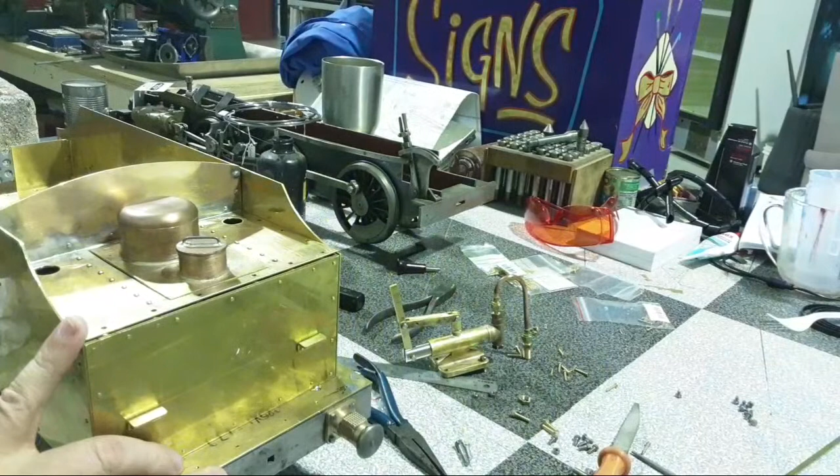My life is made up of small piles of screws, like these ones. And if we move this tender forward, those ones. And small piles of rivets. There we go.

So that's what I've been up to. Much the same, I don't know if you can actually see any progress here, but I'd like to think there was. I had 2 days off this week and this weekend, and there's a gap between them. I went back to work on Monday, so it was Sunday and Tuesday.

Most of Sunday I spent messing around making an awful video for Toolfest 2021. Go and check it out. Hope to see all your entries. I'm on the squeaky chair again. There's Maddie, g'day Maddie.

Rivets like these, Kevin. So these nice 2 straight rows of rivets. It's deceiving, but there you go.

No specific hour, I reckon the 24-hour period's close enough for us, Knox. Michael, I think probably if you can aim to within 24 hours on that date, that'll be good enough. We got too much confusion last time I tried to get closer than that. Just post them.

Maddie's flat out busy.

We'll move in a bit closer, perhaps. It's junky everywhere, sorry. So this lid just sits in here at the moment.

We have a lid that's probably going to be hinged over the back at some point, because I really can't hinge it that way. And there's holes here for what's going to be mostly cosmetic, but actual functioning vents for the tank. Reason it had vents is that most of them were fitted with a water scoop, so they have little caps on them and a flange at the bottom. So if you're filling up the tank in a hurry from the bottom, then you needed the air to go somewhere, so there's a vent each side.

So that means we can't really tip it. Well, we probably nearly can tip it that way. We'll put the vents in first, and if we can tip it that way, we certainly will. But I think it's going to be tipped this way, like such, with a hinge off the back gate, which is sort of okay. Anyway, I don't want lids that are loose.

That's where I'm at. I don't want lids that are going to get lost. Will it be painted? Yeah, black with red stripes and British rail lining, I think, or LMS, or I haven't decided. Maybe red. Caledonian Railway blue. I don't know. I really don't know.

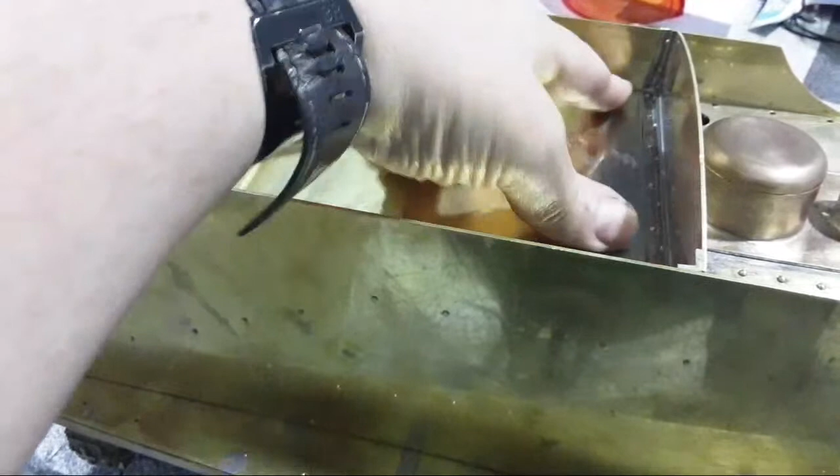I've actually soft soldered this, which I'm really pleased with this job. So I'm going to soft solder the rest of it as well, and I'm a bit more confident about it now I've done this, haven't buckled it. But...

Magnet's not a bad idea, Fridge.

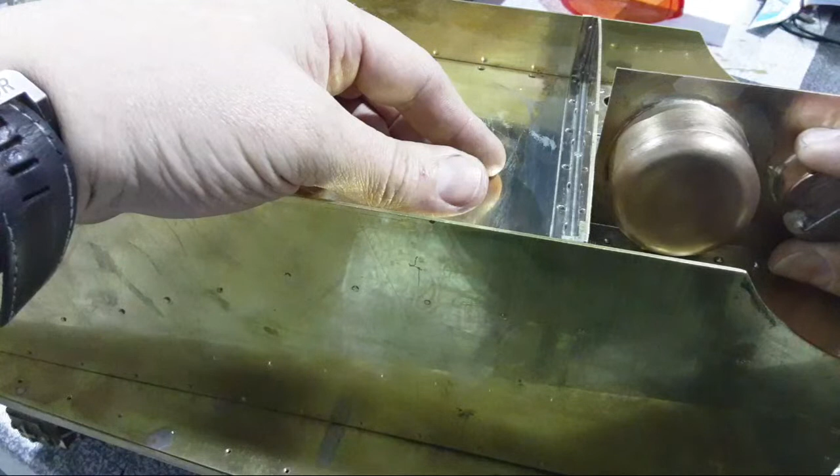Hey, John. Nice indicator from John Creasy on social media this week. Maybe we'll see a video. We might not too, but I hope we do. Before Toolfest 2021, which is coming up. We might just get lucky and a magnet might actually hold that.

Anyway, so this has got another plate riveted underneath here, and I've soft soldered it all around there, so we just sweated it. Nice. This lifts out.

It won't when there's all these screws in here. These are countersunk screws all through to here, and they all line up and look, sit flush and not too crooked or anything. I'm really pleased about that. All the way down here, and around the front and up the other side. And these ones will be round head at this point, sort of to match the rivet.

And if we've got to, we can still take that out.

Got all these on. This is a scary, rotten job actually. I'm glad this is over.

No video, John says.

This is a rotten job here. Getting all this so that that sheet with the bends in it sits down flush on here, and the bends are all right, and they haven't got too many double bends in them and things like that.

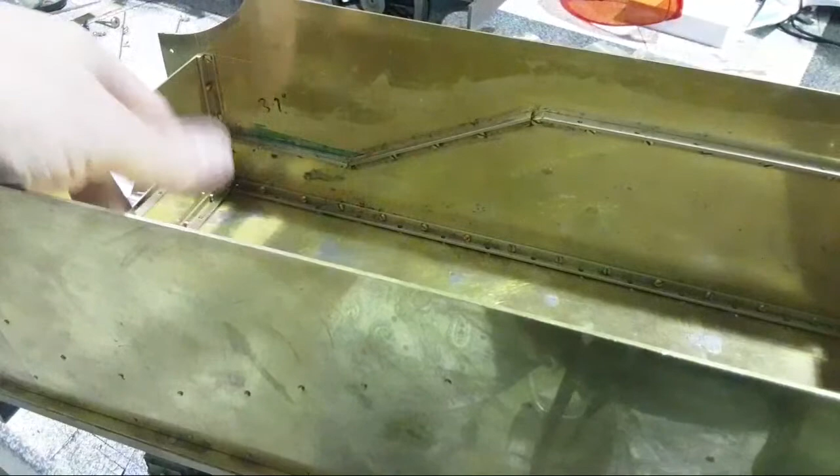This sheet fits around this corner here, which I really like. I'm a bit impressed with that. It fits around there nicely and screws across the front.

Now I've marked this here with, I don't know, you can probably nearly see the two scribe marks on there. There's an angle bracket goes around here, the same as this, up the side. And then the top, the front piece with the doors on it, or whatever's going to have, or a toolbox or whatever, will sit on there for cosmetics when it's on display, and you lift it off to use it because you can't shovel in under there. The same problem they had with the real one is that you couldn't shovel in from out the front, so they changed them.

Oh, that's pretty awful. Two ceilings down is not fun. I hope that gets sorted, Mike. That's not good.

So I've got to fix these this weekend. Put those brackets in at least so we can start making the front piece.

What else? There's an edge beading goes along here on the outside.

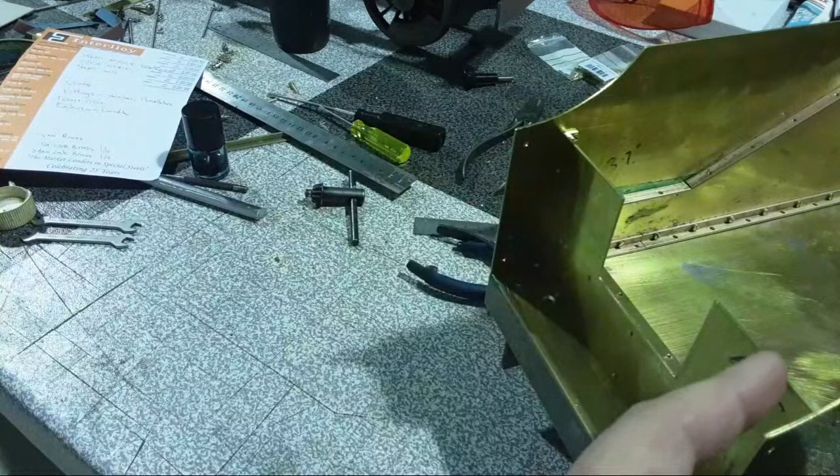There's on this side, there's a brake handle here. There's a water scoop handle on here, or there should be, but I'm not even going to put a fake one, I don't think. We'll see how we go.

This piece sits in here and hangs over the front a fraction to give it a ledge, and then there's a piece of angle behind it to stop it moving forward. So that sits between that piece of angle on the back and this piece here, I think. That's what I've designed.

Probably the earlier Fowler tender just had a full-length toolbox here, and maybe that's what it'll get, is just a metal toolbox with a lift-up lid. The later one had full-size doors through here, high doors with opening doors and a toolbox each side. I don't know if we're going to go to that much trouble. So there we go, they're forewarned.

So that's the work to still be done on this. Right, and from there,

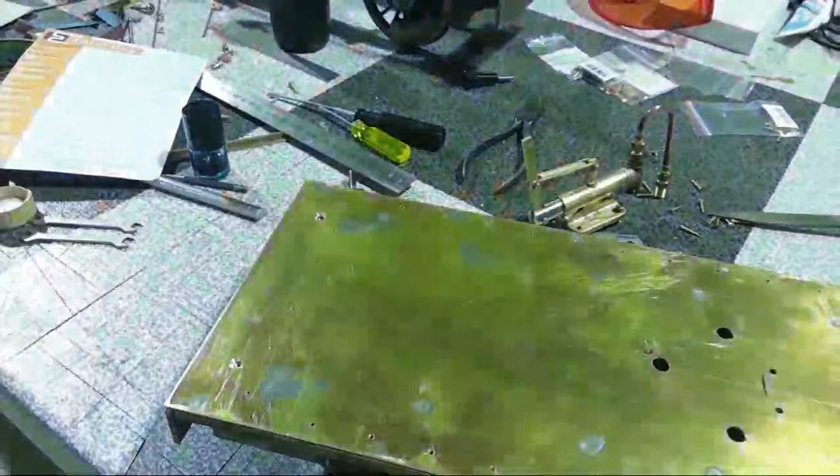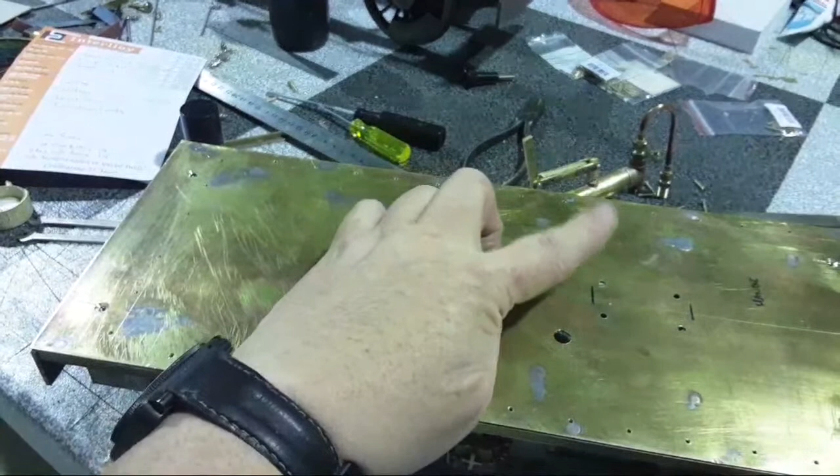If we lift this off, right, we have two more holes here, one for the pipe for a return and one for the water feed. This one's got a filter on it, and this one I think's just got a swan neck round so that it doesn't squirt up in the air. It actually pumps back down onto the... so that's where we're going with that.

I've put 4 screw down bolts in here, countersunk brass screws go in the front here, 2 in the back and 2 in the front to hold this down, right? And I've done some modifications here because when I did it, I put 4, I think 5BA steel bolts in here, one here, one here, one here, and one back here, which is okay to hold this in place.

However, it's overkill, and what you find is that when we put steps on here, which go in this gap here between this angle and the frame here, there's steps come down here with 2 steps on them and a bit of a curve for each end, which has to go on next before we bolt the tank down.

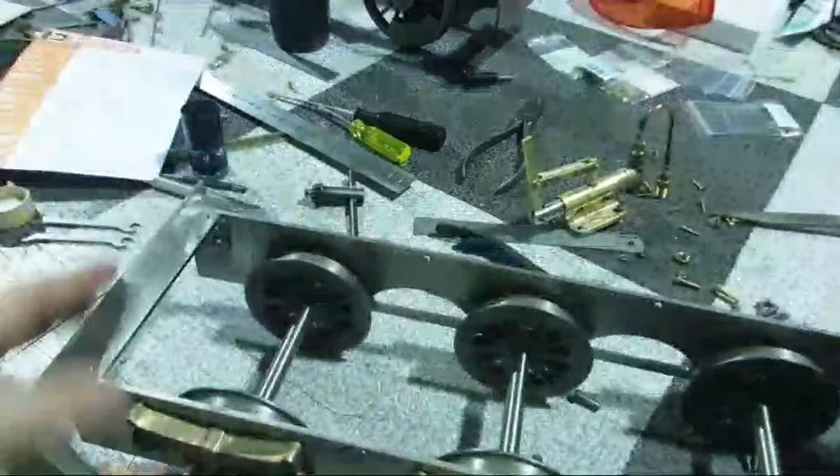Can't get to these bolts in the end, so if you have a look, actually spent an hour yesterday blocking these up. Can't see them now, no bolts, so we've just got 2 in the middle, 2 each end. That's plenty, so there we go.

Still got to put 3 bolt holes in here for spring hangers, or for brake hangers. It's still got to go in here at some point, so that's another job that we've got to do at some point. It probably, when I pull this down again, if I do, that'll probably be done then.

So there we go. Also got to put another bracket in here for a coupling plate to the locomotive. Also, there's some pipe work. There's 3 pipes. There's a hand pump delivery pipe comes through to the front here, and there's a delivery pipe from the axle pump, which is suction, no pressure in it really, comes through as well. And there's a return pipe, which is pressure, I guess. Well, there's no pressure because it's open end, but yes. So we've got 3 pipes on the front here as well.

So this is one of those jobs that feels like it's never ended.

Something to wake up nightmares, something to keep you awake is more like it. This thing's crazy.

That's where we're at. This is a pretty crazy project all up.

This pump here, I guess everyone's seen that, goes here somewhere, so that sits on there like that, and accesses through that back opening, which is why it's a big square opening, not just a little round opening. Anyway, that's where we're at.

Sorry about the squeaky chair, but that's kind of where we're at with the brass work. It's starting to look like something, but there's some jobs that I've been putting off.

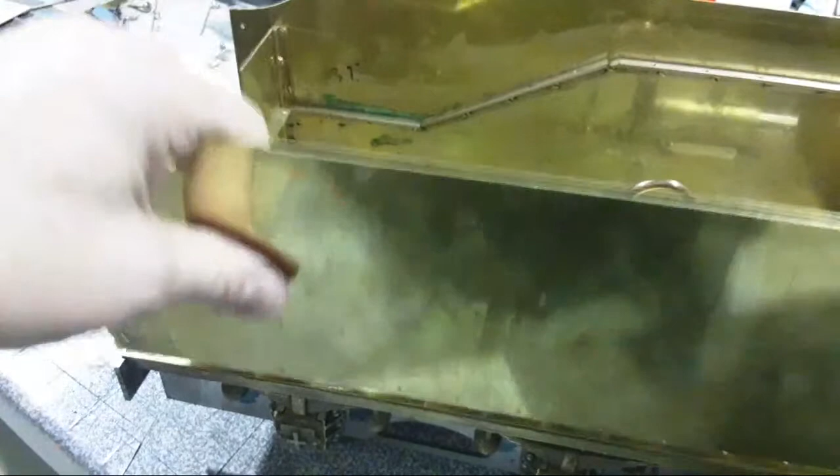Absolutely. Something's not sitting down there properly. Yeah, the wrong side of the frame.

There we go, that sits in there nice. And then this one goes on here like this. And this one, I'm going to say, have a look at that joint there. It's really nice.

Anyway, this one goes in there like that with lots more screws. So there's about 300 and something screws in there. That's kind of how we are.

There's not a whole lot of other detail. I've got the handrail holes here and here for little handrails to go on here. Bit of work in the front. We've got to make something here in a toolbox and some little hinges and stuff. There's a bit of work in that.

Probably it's not going to get polished. It's going to get a coat of decent undercoat and a coat of decent black paint. That's where we're at with it.

Oh, Maddie, you poor thing. But you can't, this is smooth. You can't actually feel this through here where the soft solder's impregnated the brass. So it's nice and clean.

You can pick up brass at bargain prices on eBay if you keep an eye out for it. And I've been collecting these up for years.

Copper pipe. Let's have a look at the boiler code, eh? So this is coming together.

It's a crazy job, and another month maybe I'm going to have a tender that's going to sort of be half looking like it's finished, and then we can move on to the boiler. That's the next bit. I'm going to put this out of the way.

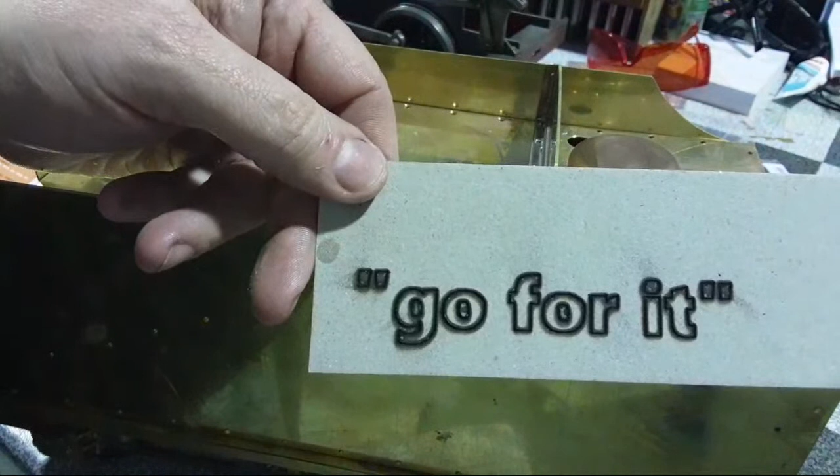In the same vein as we've been talking, a certain YouTube creator believes in this, and I'm sort of the same sort of mindset. Just do it.

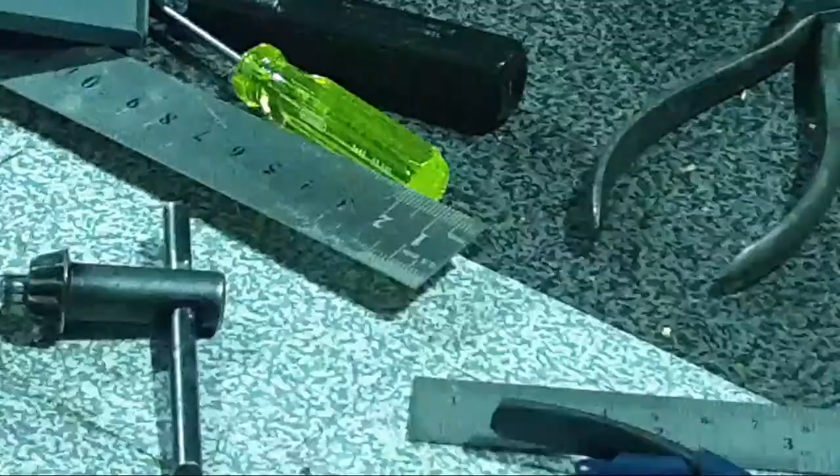So, see this book? This is it, this is where it is. Can't get to find it online. You won't find a cheap copy because the copyright on the thing's guarded, and it's a small community, so you've got to actually buy the book. There's several places you can buy it. This is the Australian Miniature Boiler Safety Committee Code, Part 1. There's 4 parts to it. I've got several of them. Never built a steel boiler, so I don't have that bit, but I've got a few of these.

This is the book on copper boilers. Thanks, Craig. It's fairly comprehensive, like it's got lots of crap in it. It's got types of metal and all the copper codes. If you're going to get certified, you've really got to stick to that, know what you're getting. Brazing alloys, bronze and gunmetal, caulking materials, etc, etc, etc.

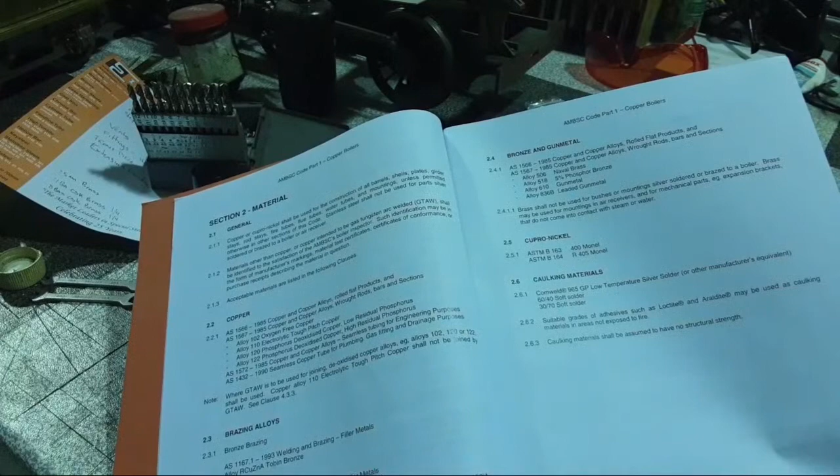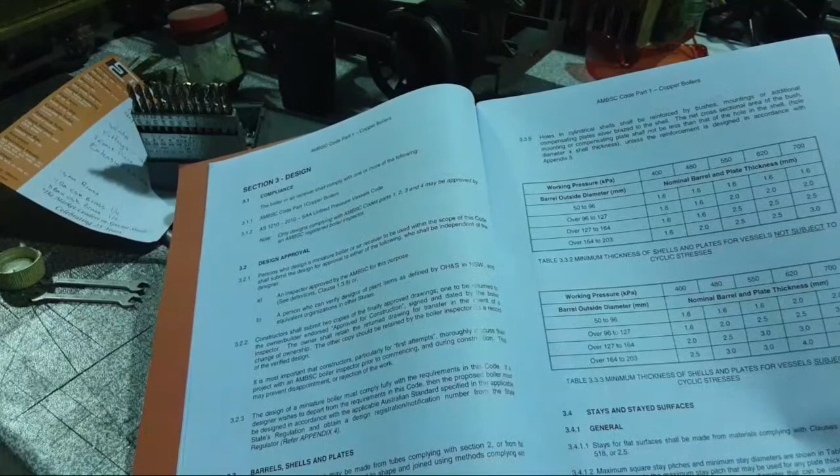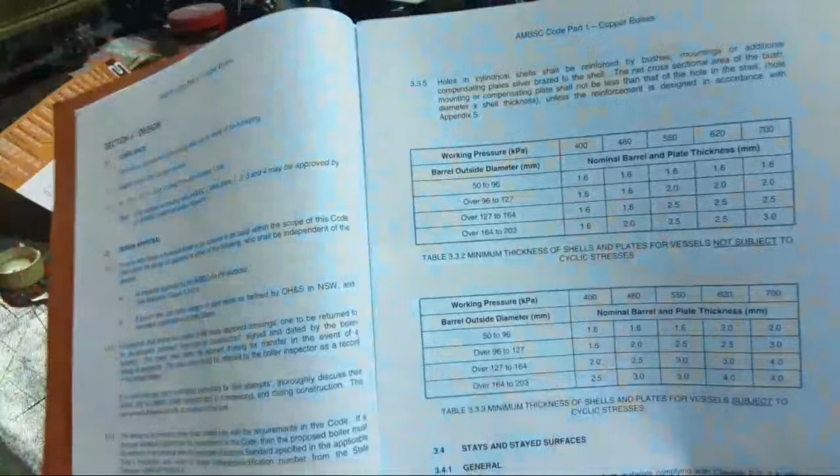We'll move on to design. So what do we got? There's a question: what type of copper is suitable for a steam boiler? 80mm diameter, nominal barrel and plate thickness is 1.6 mm, which is normal seam copper pipe, which is a bit of a problem for boilers. Something without a seam is probably better, but this is for vessels not subject to cyclic stresses, so gas tanks, I guess, and air compressor tanks. I don't know what else.

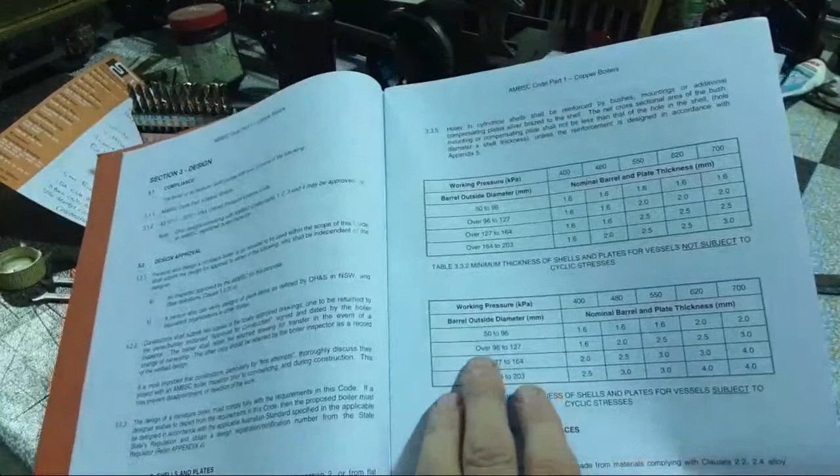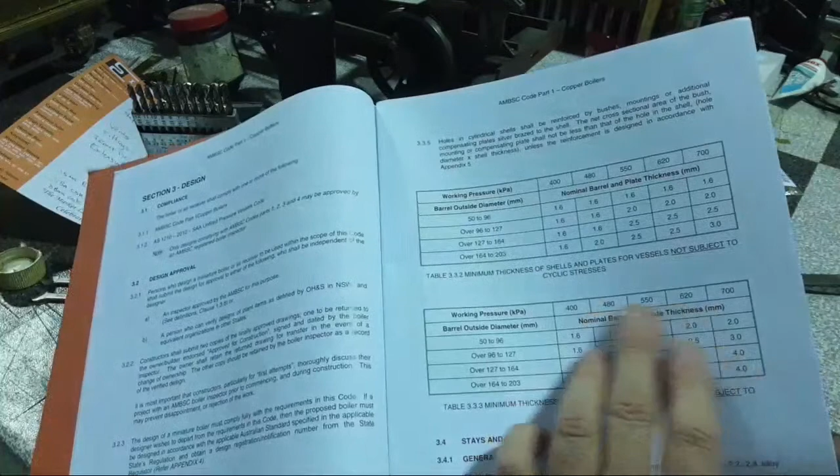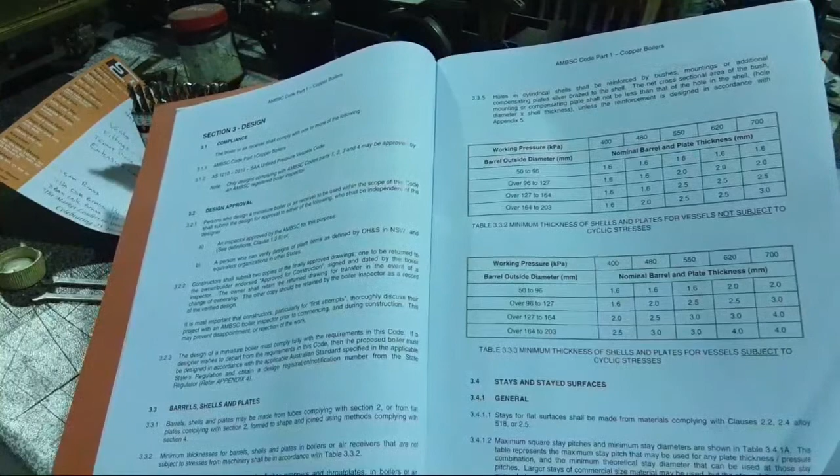And this is for those that are, so heating and cooling and stuff like that. So 80mm, 50 to 96, 1.6 is suitable up to 80 psi with the right stays and things in it. That sort of copper tube, that's the sort of pressure you're probably going to get out of an 80 psi tube if you stay it properly and put some tubes in it and decent ends in it. That's what's safe.

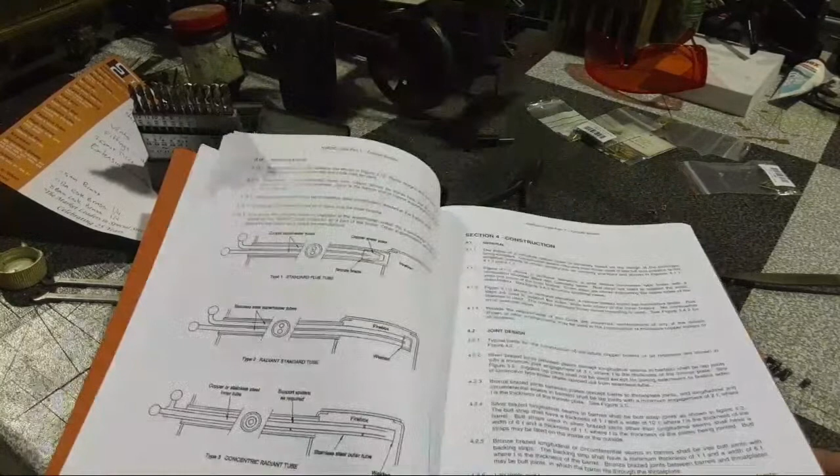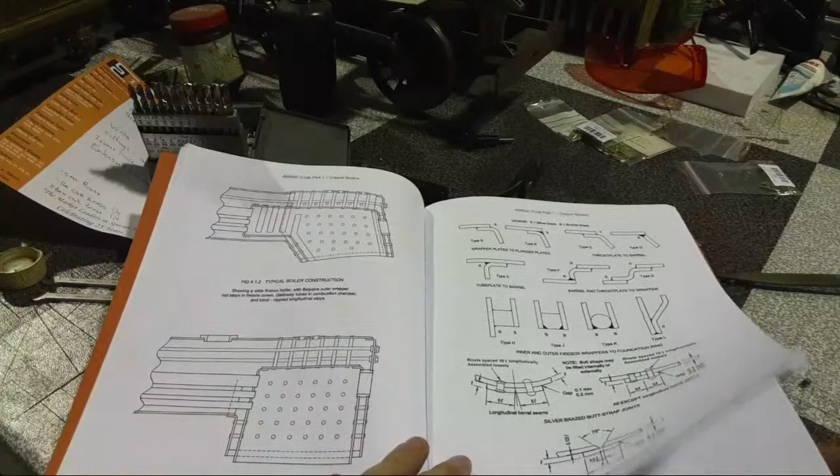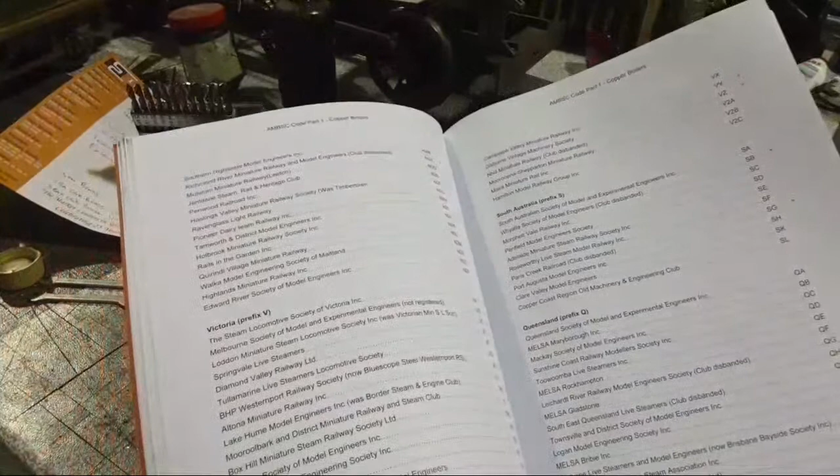This has got a crap load about stays and end plates and everything else. Bushes, domes, superheaters, lap joints and brazed and silver soldered joints, the butt joints and lap joints and so forth for barrels, safety valve design, washout plugs, and appendixes on all the above over here somewhere. All the New Zealand societies that use this actual system, and the Australian ones will be here too. There'll be pages of those. Probably should go through and chase all them up and see who has a 3.5 inch gauge track that's closer than the Queensland Society of Model and Experimental Engineers, which is like miles away.

Blondie Hacks had a bit of trouble with the copper boiler. Yes, she's trying too much at once. She just hasn't got the heat to heat the whole thing up. The boiler's too big for the deck thing that she used. She'll get it right, but the reality is that if she'd soldered one end in and pickled it, then put the rest together and soldered the other end and pickled it, then put the tubes in and pickled them, she might have had some success, but she's just pushing the boundaries a bit with that.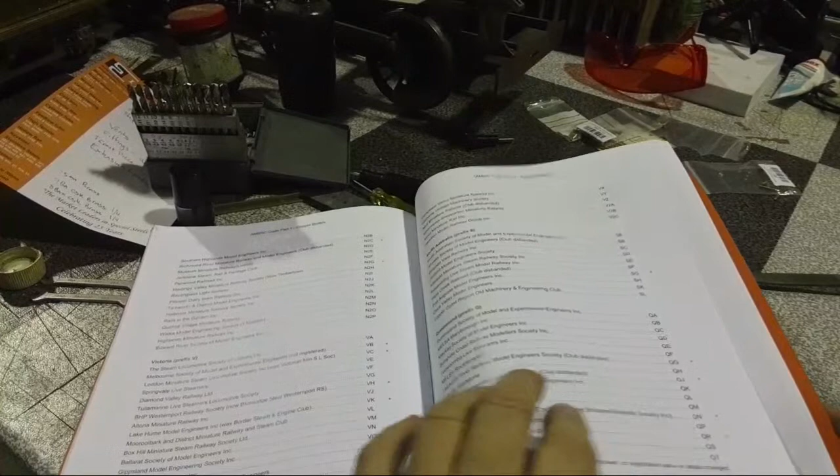Anyway, that's the boiler code. That's what it looks like. Difference between, or spacing between tubes and all that sort of stuff. I've studied it until I'm sort of saturated with it. But anyway.

If you can find it online, that's good, but I'm not sure you will. I never had much luck with it, so I just basically bought it. But if you want to know anything, I'm happy to screenshot it.

So there we go. That's the chaos that is building a 3.5-inch gauge locomotive.

You did pretty well in a weekend, because that's Russell. That's a mammoth job. Hang on, I'll just set up the bending brake.

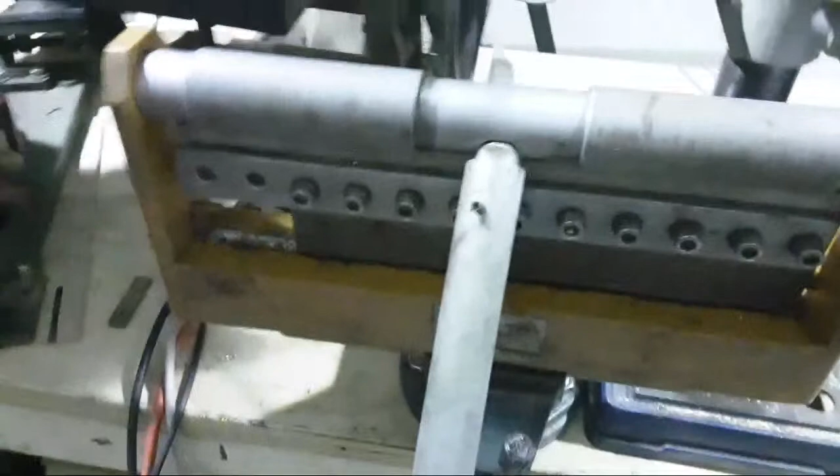So we're going over here, and I've got bare feet, which isn't really good in the workshop. This is what I've got.

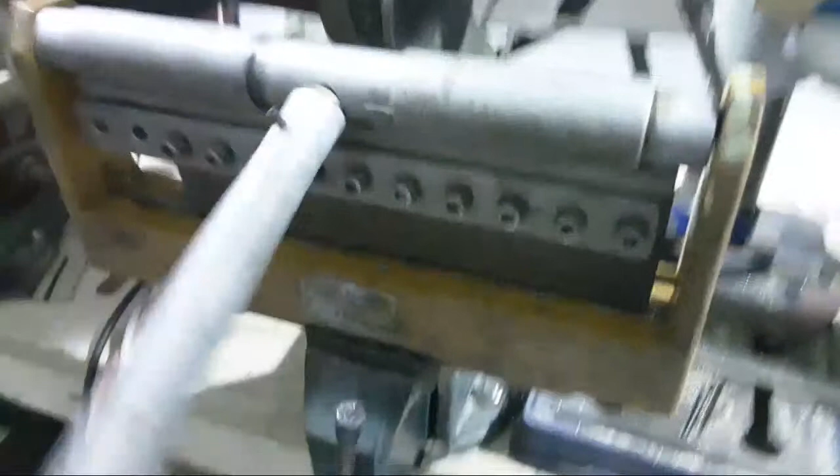Don't have anywhere over here. I had every intention of getting somewhere over here to set this up. This machine's done a fair bit of work, as you can probably see. It needs some love, but I have this little brake.

It's missing the jaw, it's there on the bench. I should put it back in. It's fairly useful to take it out sometimes and then discover that you still can't get the part in there. It's just on a cam, so it's pretty straightforward.

It has some limitations. Don't buy one of these for model work. For one, you get a shadow line there even with the light on. And you see I've got a light right there over my vise for this because before I had problems, but even with this you get a shadow line.

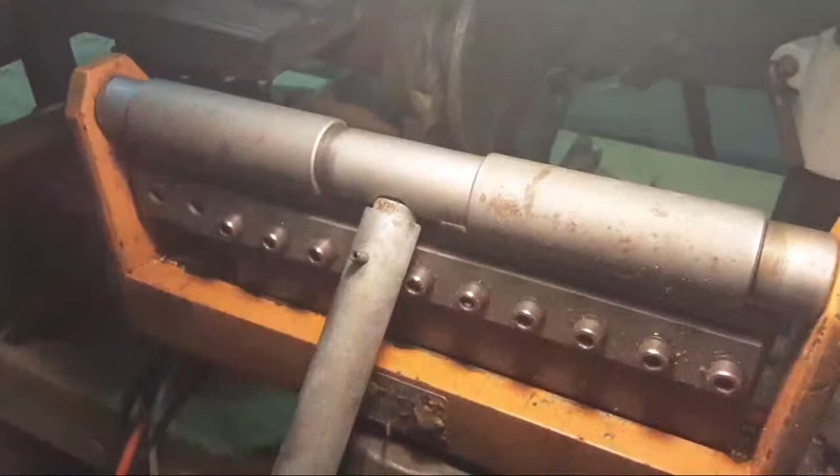So you can't really see where you're actually lining up the line without a lot of messing around. This light should be out this way a bit more.

Poor thing, could do with a wipe down. Also, it won't bend anything closer than basically the width of this V. So the problem is you can't bend a bit of sheet less than about 6 or 8 millimeters from the edge. That's a bit of a problem with it.

Okay, Dan's listening to some pretty ordinary, interesting sort of stuff in there. She was obviously... yeah, who knows.

So this bender could do with some work. It could also do with some mods. Ideally a brake press would be really nice for the sort of work I do. This is good for bending heavy sheet metal in short bits.

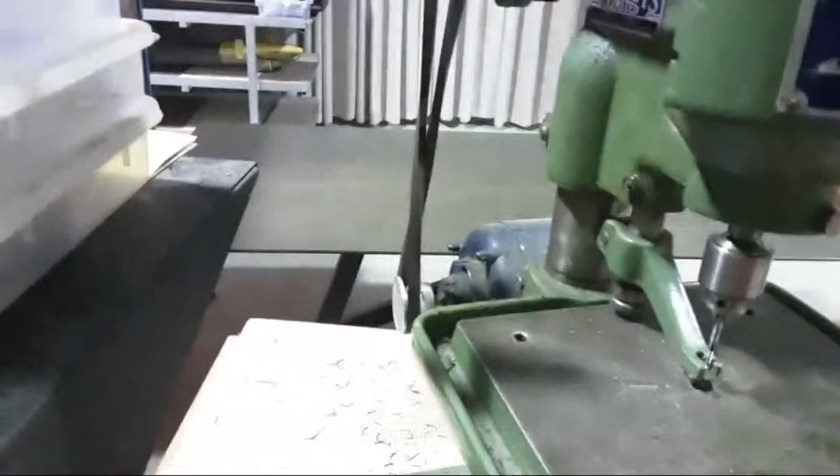This is all an experiment. Should have worked out camera angles at some point earlier. What else have we got here?

We might have something there. We've got that. I think we got it.

Look at that. This thing needs oiling every time you use it. There's about 1,000 oil points.

I don't know if anyone's really entirely interested in this. There we go, we've got actual lift off. But this is the coolest toy in the workshop.

See, that's bomb proof. There's 4, 8BA holes.

Dan, you're probably right. Hey Dan, good to see you. Journeyman Randy, good to see you too. So, yeah, this is...

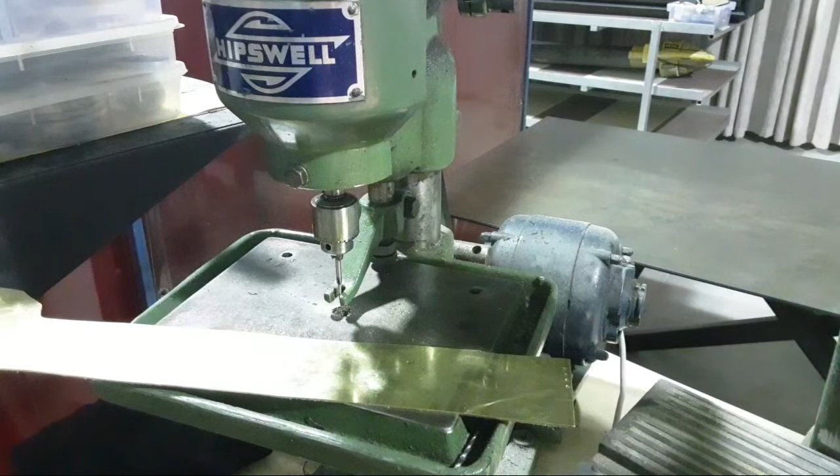But awesome machine. That's 8BA, which is 2.2 millimeters, something like that. Someone will correct me, but I think that's about what it is. The motor's the original one off the mill, so it's relatively the same time period.

Now, I'm going to put a question out there. Here, see this round belt, right? It's a woven round belt. I think it's not going to last forever. It's starting to come apart.

Can't see it any better when it's vibrating. But this round belt has to be round because it runs around both pulleys and back onto an idler on the other end. And it's stretching a bit. It's about 3/8, I reckon, 10 mil round belt. If anyone has a source or an idea where I can find that, and in particular how to splice it together when I do find it, give me a heads up.

But yeah, the motor's got that like ozone and varnish smell. Yep.

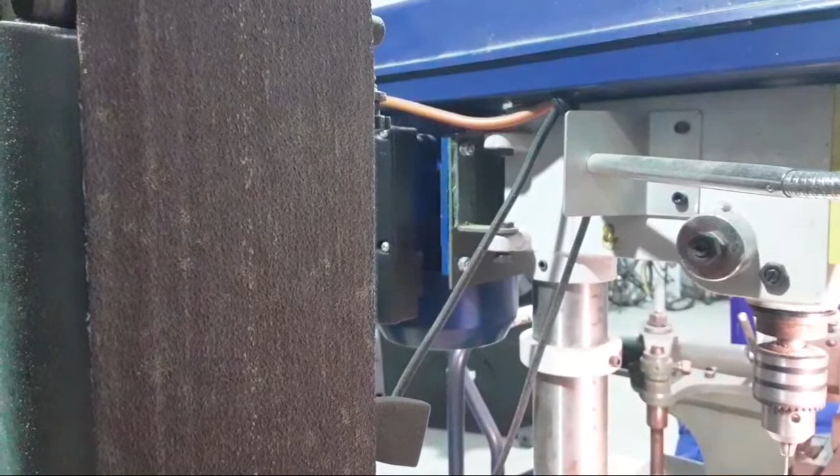What else we got? We've got a drill press there, which is sort of all right. It's got a modified light, I don't know if you can see that. It's got a desk lamp that's been put on there. And a new motor at some point.

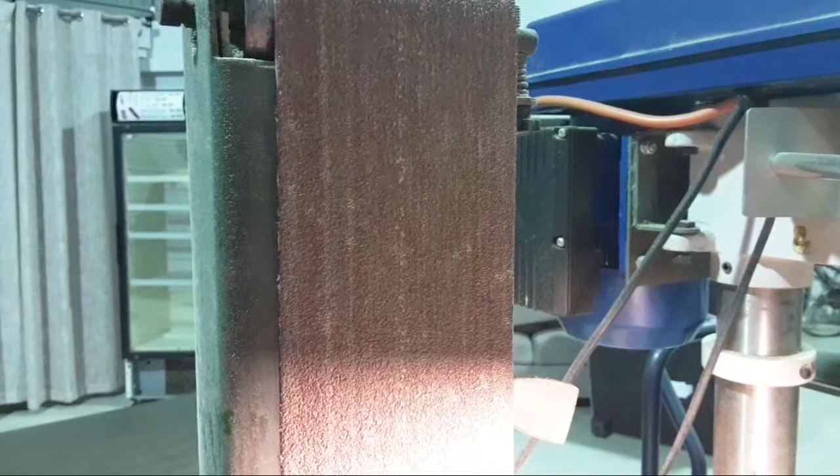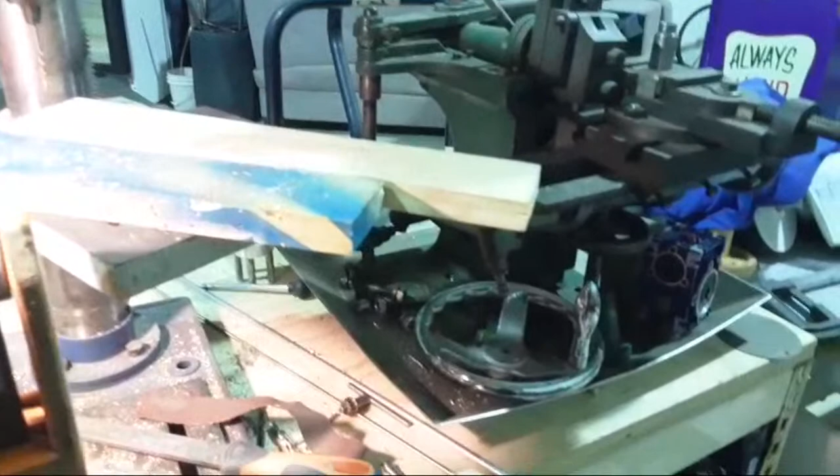Next door's a shaper, which isn't even bolted down yet. We've still got some thoughts about that, whether it's going to go there, or whether this is going to be the actual bench for it before we bolt it down, because there might be another option at some point. This place just needs to put some bolts away before we go much further, to be honest.

So, there we go. That's what's happening. Shout out for onside belting.

Not sure about that link, Kevin, but I'll have a look a bit later on.

Jim's off to work too. Take care. It's tough having to work for a living. I've had to work today and it's sort of cutting into my leisure time, to be honest.

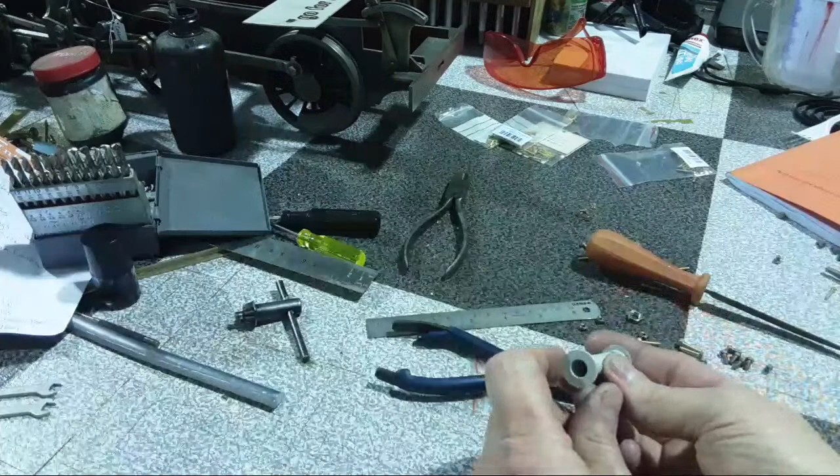So, these little vents on the back of the tender look something like this, by the way. I've just 3D printed these. I'm not sure they're actually going to look like this, but that's sort of what they should look like. A bit of copper tube in the middle and some sort of a bracket on top and some sort of a dome piece and a flange on the bottom.

Bill, when can we expect a video? Bill's got new tech, so obviously he's gearing up to shoot videos, and I believe that he's actually been shooting some footage, so just got to see it all sort of edited together. That doesn't mean much, because I know other people who've been shooting footage and not uploading them for a long time.

Not looking at anyone in particular, Dan.

What else? I've been going through my rotring pens, tidying them up and finding how many bits I've got missing and how many complete ones I can make from what I've actually got. It's a bit sad, really, they're all a bit messed around.

So, anyone who's familiar with rotring drawing pens, these are nice, but not when they're not working properly. It's a fairly fine one, it's 0.25. Come on, focus.

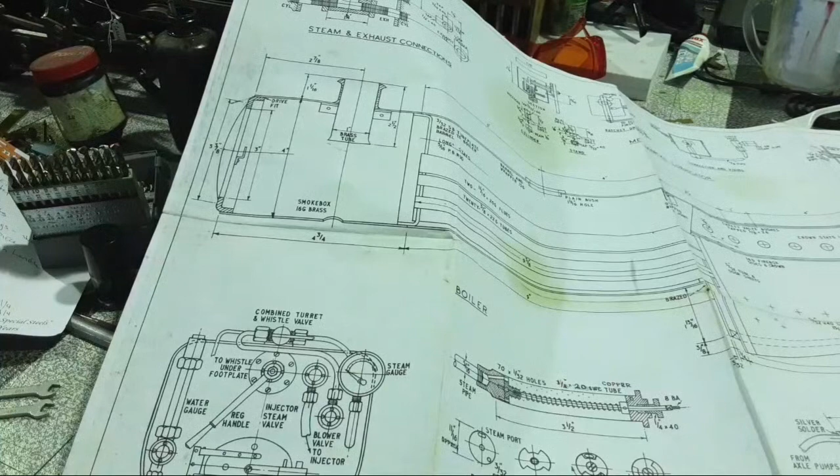This is it, the absolute nightmare that is. We've dropped out again.

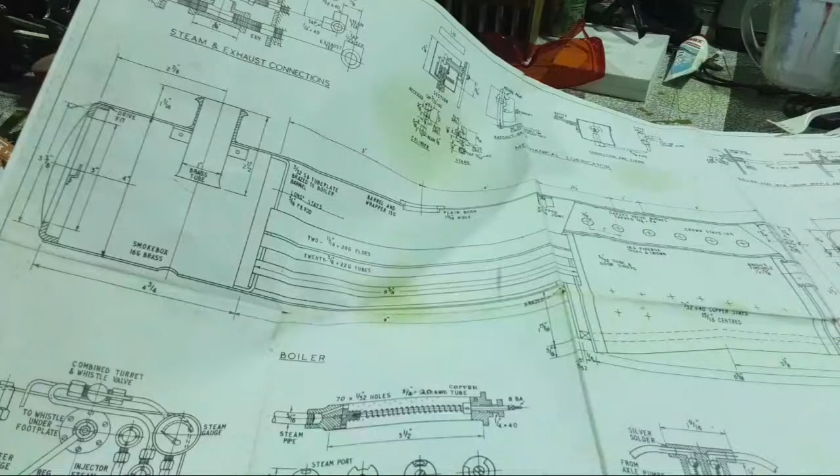It's probably possible to make boilers from steel, but not for something this small. Getting a bit fiddly, and putting nice fillets on it so that it actually seals with a welder or TIG or whatever is beyond my ability.

This isn't huge. The main boiler barrel here is only 9 inches long. The smoke box is 4 3/4, and this here is 6 7/8 along the firebox, so in inches. So that's, what have we got?

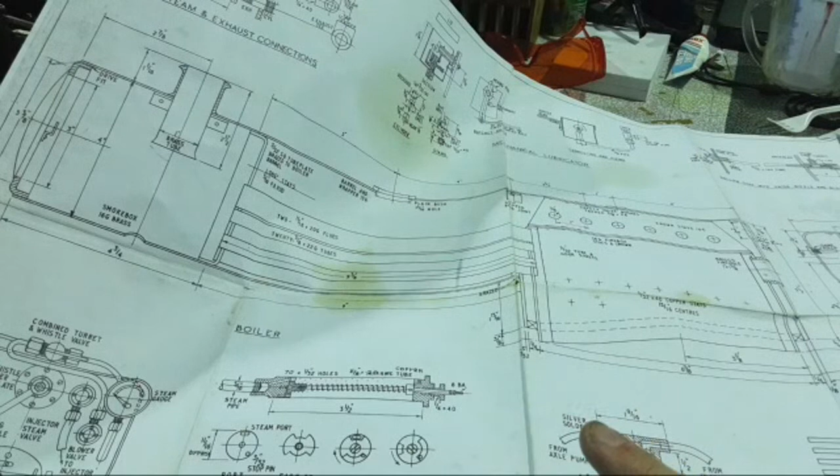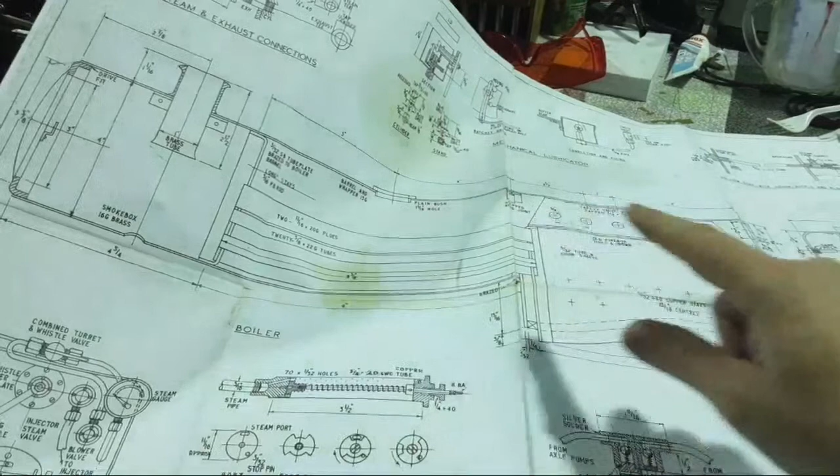So these stays are going to go, right? It's got girder stays through it. Have a look, I've actually got an appointment, not this weekend coming, but the one after, to talk to a boiler inspector about this, which is pretty exciting. But these girder stays are not up to code, right? So they're going to go, and it's going to be stayed.

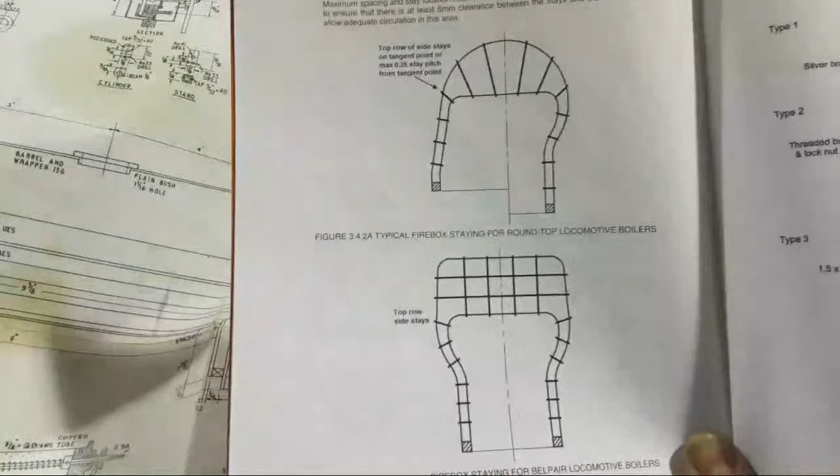Going to be stayed something like that with rod stays, which is a bit more up to date, and it allows a little bit more circulation to things like water gauges and better convection, stuff like that. So that's probably one of the major improvements here, or design changes, or evolutions in copper boiler making since 1935.

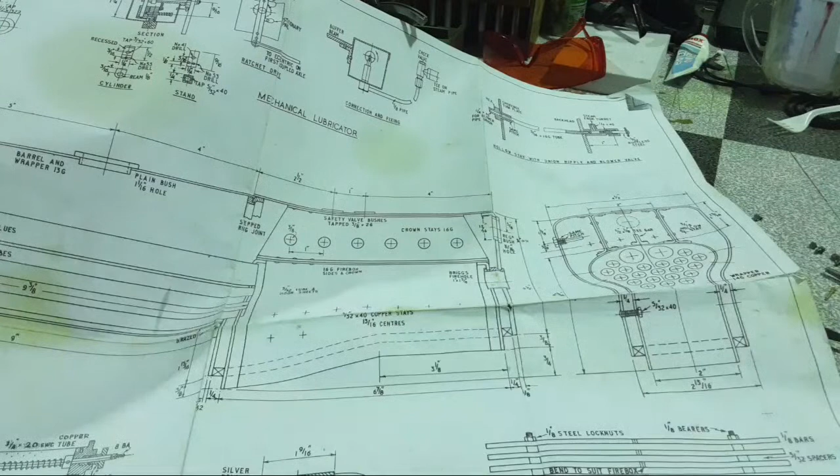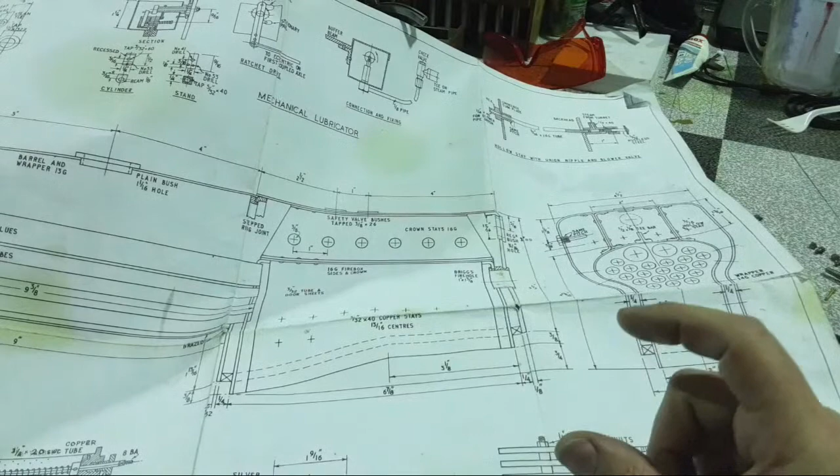So there's a foundation ring around the bottom here, which is solid copper, and I think that's actually a braze joint rather than silver soldered, so that's going to be fun. This firebox here is not huge, so it's only 2 inches across here, and 6 3/4 or something. So it's not huge. It's sort of grates like this.

So that's the grate. Boiler tubes, we've got 20 3/8 tubes and 2 11/16 tubes, or flues, it says. 11/16 by 20 gauge flues, which are probably a bit light, to be honest. I don't think you'll get 20 gauge tube, but I think they're probably going to be 1.6 or 2 mil.

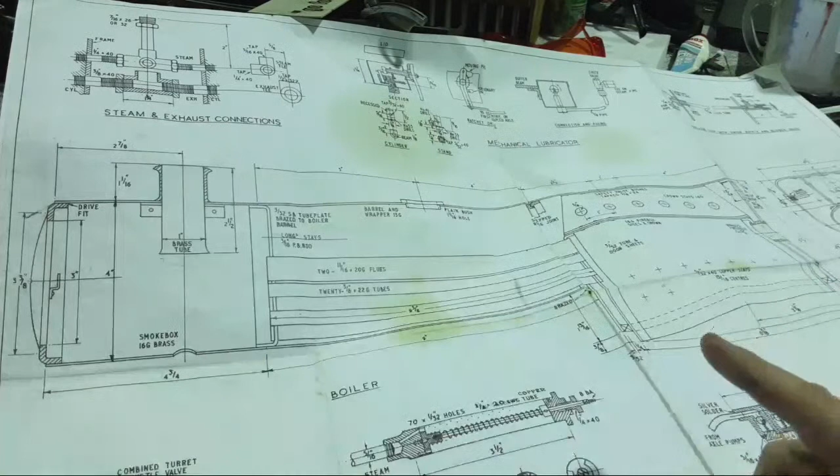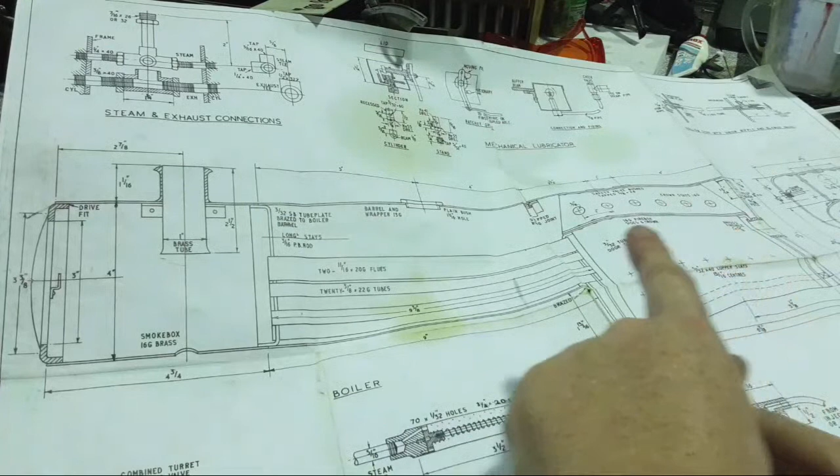Superheater runs through it, which will be one of those fun things. The regulator pipe will come through from here on the end of this. It comes through to the front bulkhead, and then there's a pipe that goes through here. If we make stainless steel TIG welded superheaters or buy them, we can go right back here to the end of the firebox and get them nice and dry. But copper ones only come to about here, so the flame doesn't actually melt the copper. And back here, and then back through the bottom here into the locomotive.

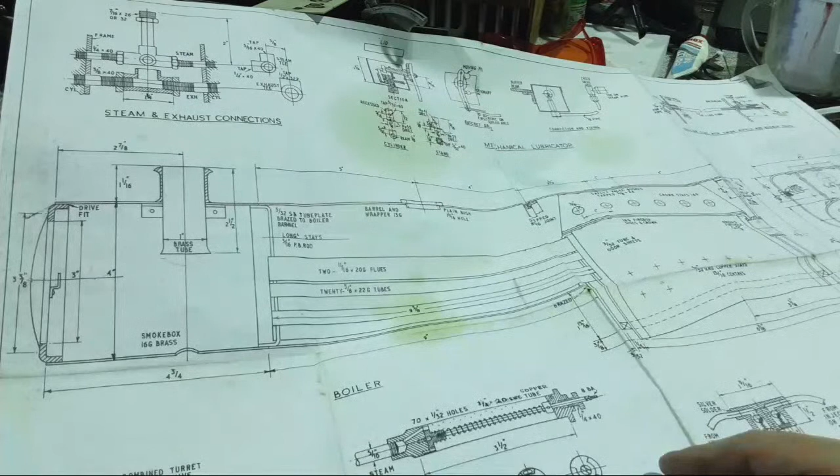So that's where we're at. That's the boiler. Most of these bits, that lubricator's done. It needs a new ratchet wheel because I'm not happy with that. But apart from that, it's finished and it works. These connections are all done.

So I put together a price list on EJ Winter's website, which is probably the dearest place in the world to buy copper, and got to about $800 with copper here.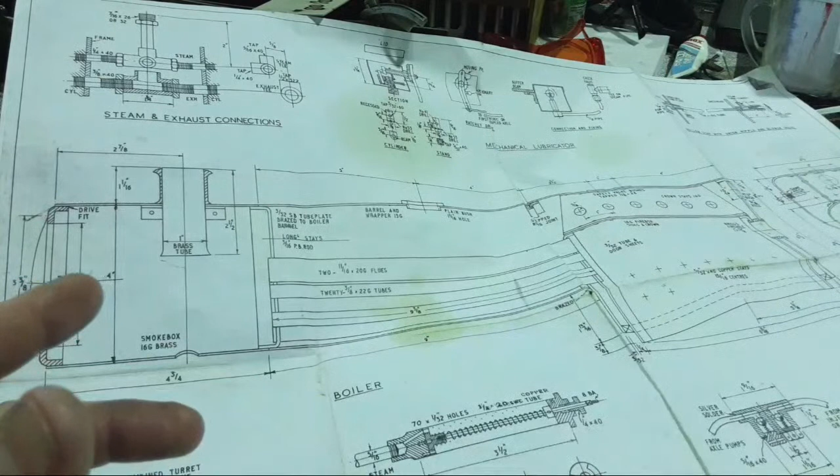So we're going to have two parts here. A tube with a cutout in it and a lid that actually lifts off or slides out, so that you can actually service that without having to work through the door.

You jump on the American, for instance, Facebook pages and see some of the plumbing and pipe work on some of their engines, and you think, holy crap, I'm not standing next to that. It's a bit ordinary, really.

Domestic hot water fittings on boilers I'm not particularly happy or confident about.

Anyway, this has got to be tip top and precise. There's not a lot of water gap in it anywhere, and it's got a crap load of copper stays that all need to be sealed. I'm fairly confident with building this, really. I don't think there'll be any issues as long as I've got enough heat and I break it down enough into parts and do it in the right order so I can solder all the joints.

But I've got to talk to an inspector about it first and see about plate thicknesses. I think these plates here have got to be 2mm. This one and this one and this one and this one, and probably the wrapper over the top and the middle in the smoke box. So this wrapper and this wrapper have got to be 2mm. These stays are way under, and I won't be using threaded ones. These stays here on top don't work, but there's going to be a girder or a T-stay or something in the middle here to stop it bowing upwards.

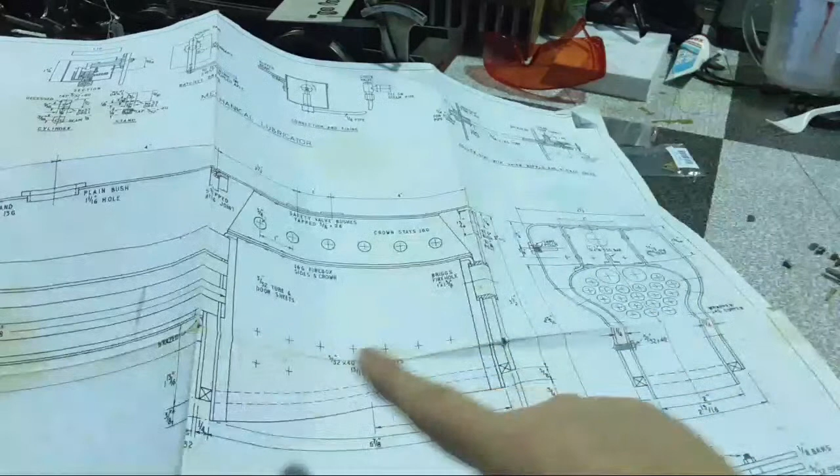And these stay distances are going to need some modification too, probably.

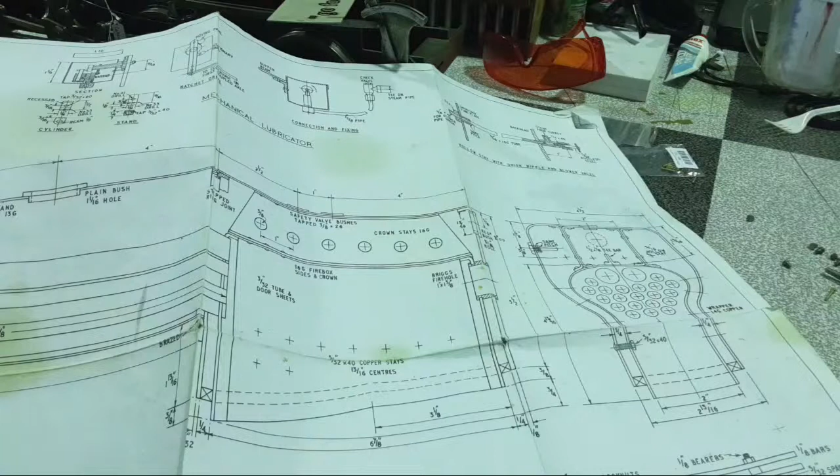This is 3.5-inch gauge, so it's not crazy big. Not crazy big. But it's small enough to be fiddly too.

There's 1,000 things for grates and things too, whether you use a cast one, a fabricated one, welded stainless, or bolt it up out of steel - whatever you do, I don't know. So you've still got to think about that and what happens.

There's this crazy bit of gear that's called an ash pan. The middle axle or end axle goes through the middle of that, which can't be great for the works. It's all right if you keep it clean between runs, I think - that's what that cutout's for. And that's all got to fit under there as well and have some method of emptying it out and removing it.

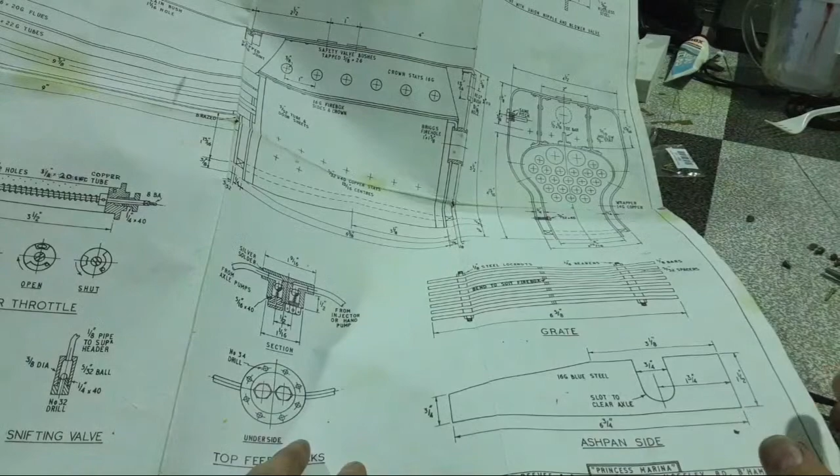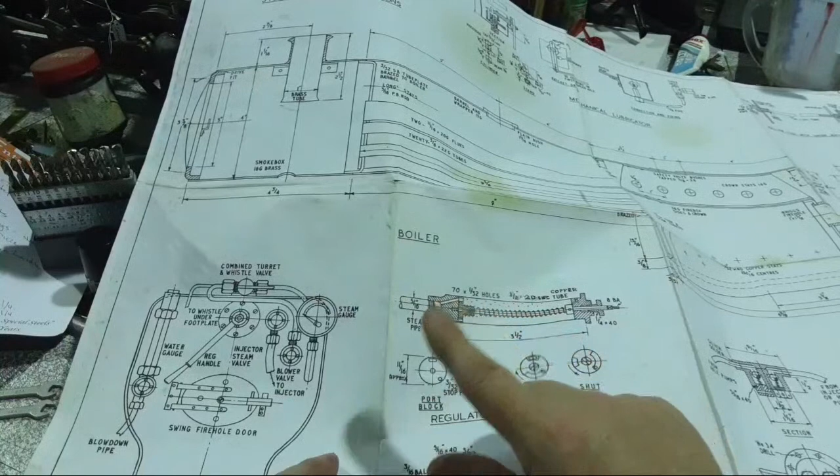There's a regulator, which is a disc, basically a spring-loaded disc on a plate. Your steam comes in here and holds the disc against it. The spring only holds it against it when it's got a relief valve, so I think it only holds it against it when it's cold, to stop it falling off, so it actually seals again when you get steam up. And that's got a hole on a slotted plate like this, face of the valve.

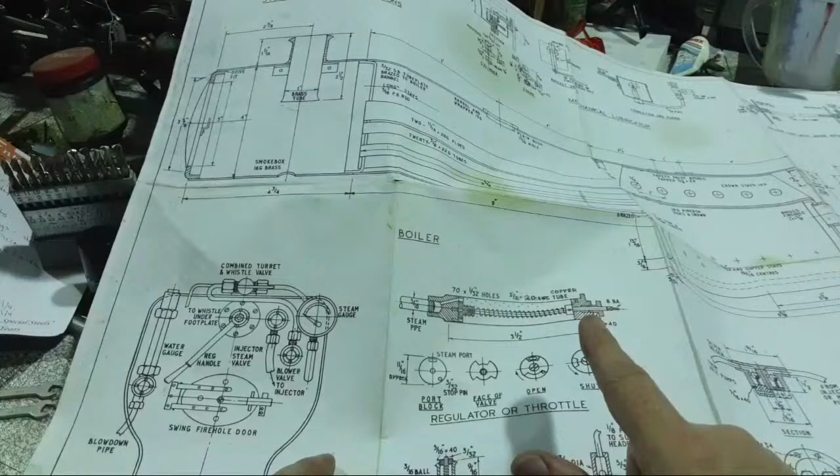And it's got a pin for limiting in the bottom. So that's an interesting little build, with a handle out the back and a gland there to stop it leaking maybe, and 70 by 1/32 holes all the way around here to pick up steam.

That goes in this bush here, from the back. I think it's actually got bolts around it, which is going to be fun. And then there's a pipe that runs all the way through, which works as a hollow stay or as a stay.

As well as another tube all the way through to the top. And then on this end here somewhere, it's got to have some sort of an outlet to go to your superheater. Take care, Randy.

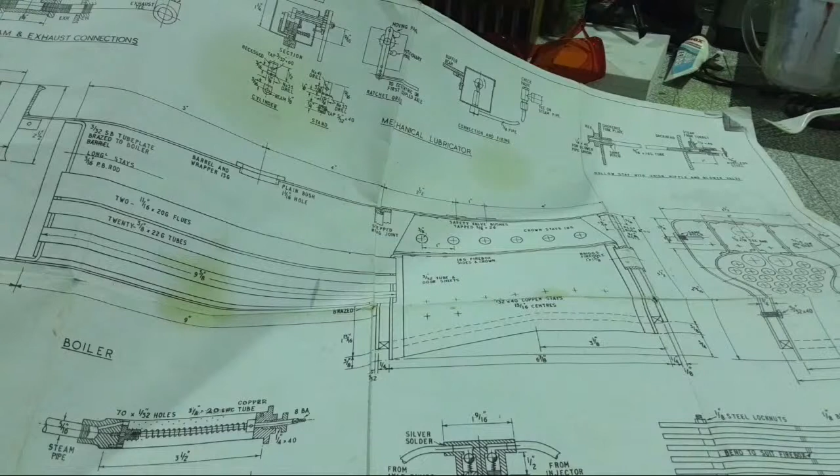So I would like to think I can make a boiler without too much caulking, but the code's got all the information about that if we need to. It's a long and complicated discussion, but basically I know the code reasonably well, I think, now.

And all I've got to do is talk to the inspector and say, just sign off on stuff, and get a copy of this drawing, which I need to get before next weekend, or the one after, and take it up to him and get some annotations on it, and they can keep a copy and I keep a copy, and we come back and start building it.

But anyway, Toolfest 2021, I've got a cool project for that, or a couple of cool projects, but we'll see which one actually makes it. What else? Oh, there's 1,000 projects here anyway.

Gonna need some bronze for boiler fittings, that's not a huge deal. Got plenty of it sitting around here anyway.

I don't think they were rust sealed when they left the factory. That's kind of where I'm at with it. I think there was probably a little bit more science to it than that. I like to think if I bought a factory boiler with a traction engine on it that was basically the same sort of dollars as a 100-ton crane, nowadays as far as capital expenditure, that the boiler was sort of a little bit better than that.